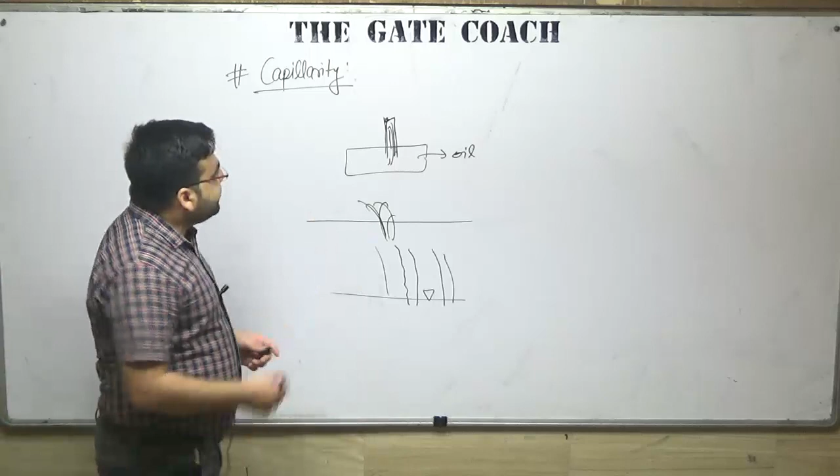Now what is actually happening is, what is the reason of capillarity? The reason of capillarity is the forces of adhesion and cohesion.

What is adhesion? What is cohesion? We already discussed this in the last class, but let me repeat it. Adhesion, 'add', means you add two different quantities, like 2 plus 2, 2 plus 3. So add means different. Similarly, adhesion means the force of attraction between two different particles, or between two different media. And cohesion, 'co' means same, so cohesion means the force of attraction between same particles.

For example, Fevicol is an adhesive. If you apply Fevicol over a surface, you can stick a paper or anything to it. So adhesion means between two different surfaces, and cohesion means between same surfaces. That is what we already discussed regarding the forces of adhesion and cohesion.

We also discussed the angle of contact in the last class. Somebody was asking for an example of a non-wetting and wetting fluid. I told them that if you have water and glass, it is generally considered a wetting fluid. If you have mercury and glass, it is generally considered a non-wetting fluid. But I cannot say water is always a wetting or non-wetting fluid, because water can behave differently in different mediums.

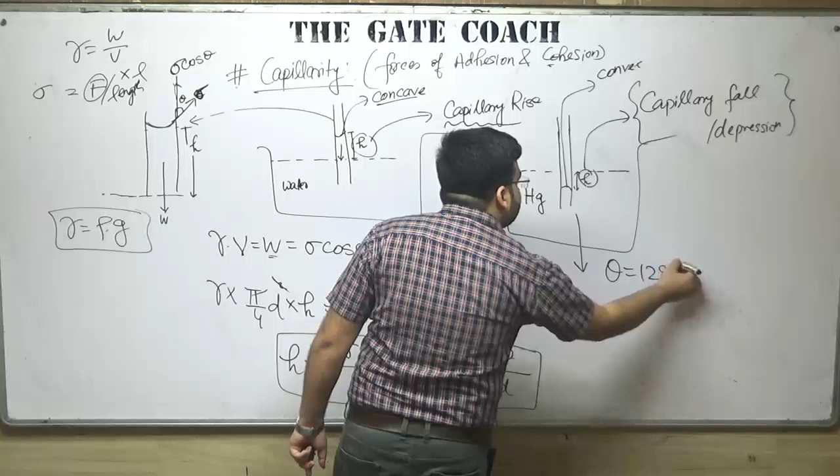The same formula is also valid for non-wetting fluids also, and for theta at this interface, you should remember two thetas. First is the theta between pure water and pure glass, that is 0, and the theta between mercury and glass is generally taken as 128 degrees. So we'll be getting some negative value.

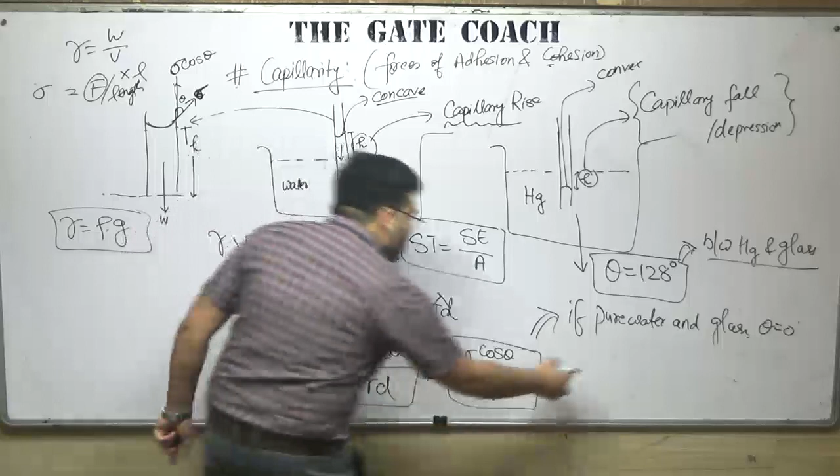Negative means it is depression or fall. Clear? And here, if pure water and glass is used, then theta is equal to 0 degree. And if theta is equal to 0 degree, cos 0 will become equal to 1. So h will become equal to 4 sigma divided by rho into g into d.

Clear? Okay, now let me see some questions.

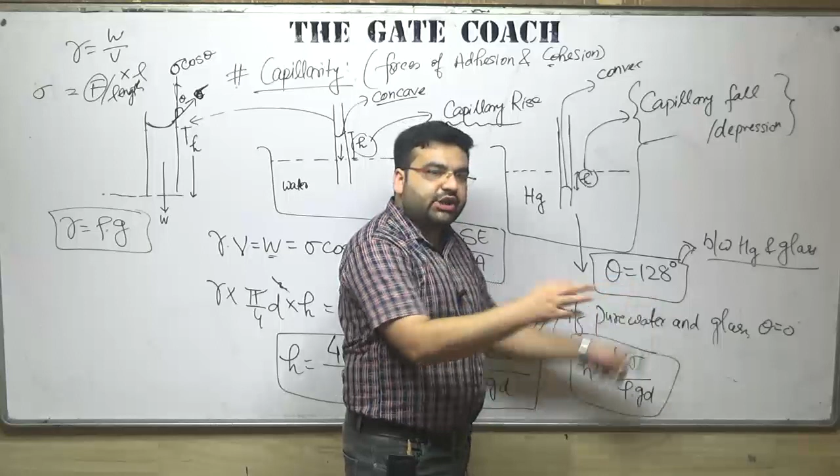Yeah, in some books it is also given as 130 degrees. Okay, but I have seen 3 or 4 books, one is DS Kumar, another one was White. So in those books it is given as 128 degrees. Generally it is mentioned here in the question, but if not mentioned, either you can take 130 or you can take 128 degrees. You will be getting a difference of hardly 0.1 or 0.2. Okay, don't worry.

Yes, the vertical component of the surface tension is acting against the weight of the fluid.

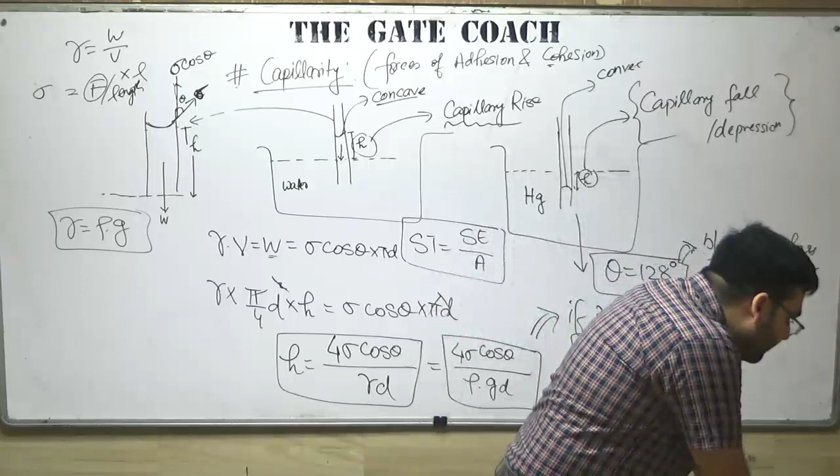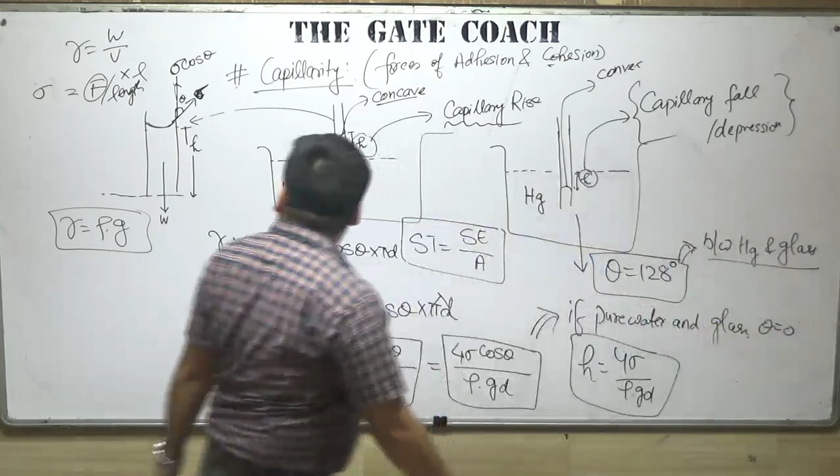Okay sir, what about sigma on the left wall of the capillary? Left wall of the capillary? This one? Here also we will have sigma, on the whole circumference.

Let me draw a top view. If I draw a top view, this is the top view of this glass. So we have sigma everywhere, here also we have sigma, sigma per unit length is everywhere. So if you want to calculate the resultant force, the resultant force will be equal to sigma into pi into d. So sigma is acting on the circumference.

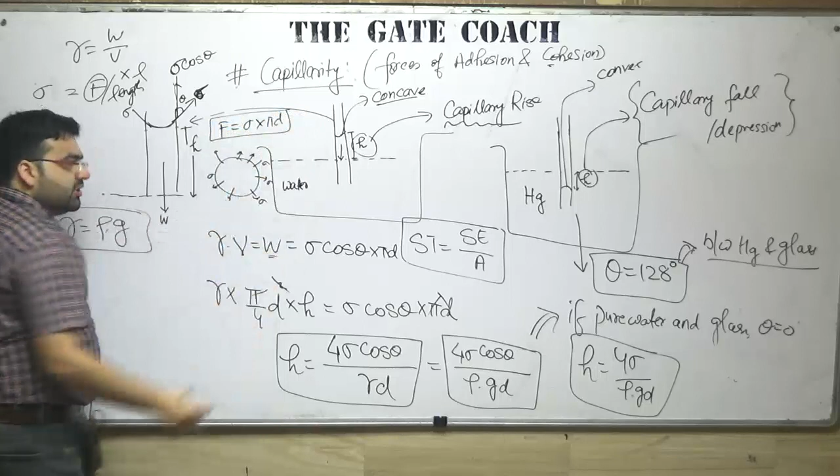Sir, if you put capillarity... Okay, please repeat, I will repeat it again, don't worry. Let me use another marker to explain it once again.

Okay sir, please repeat, please repeat. Okay sure, sure. Yeah, that is the same reason. So this is... Ranga, some name is there.

Okay sir, yesterday while explaining surface tension, you drew the resultant force acting on the particle at the surface, and net downward direction. Okay, so that is what I explained. Yesterday I explained that the resultant force is acting downwards, and today I told you that there is a tangential force.

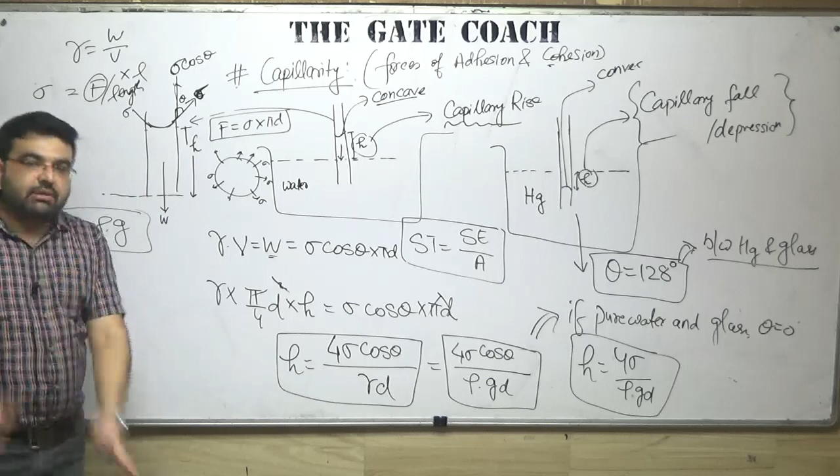So what is happening is that a particular surface, a particular liquid, due to surface tension, wants to have minimum surface area. Due to stability, it wants to have minimum surface area, because if you have the minimum surface area, you will have the minimum surface energy. Clear? So for example, this is a particle like this.

This is acting downwards, the resultant force is acting downwards, but on the surface also, yesterday I explained that these are pulling each other. Due to cohesion, these molecules are pulling each other. And at the interface, we have a resultant force. So here we have a resultant force downwards, and at the interface, we have a resultant force in this direction.

So that is surface tension per unit length. If you are calculating it with the area, it will be surface energy. If you are calculating it with the length, with the circumference, it will be surface tension.

Okay, let me again repeat it, because a lot of people are saying sir, repeat it again. Okay, so now let us repeat it with capillarity.

So what is capillarity? If somebody asks you what is capillarity, you will say that the rise or fall in a thin glass tube, due to the forces of adhesion and cohesion, is known as capillarity action or capillarity. Okay, so now what does it mean?

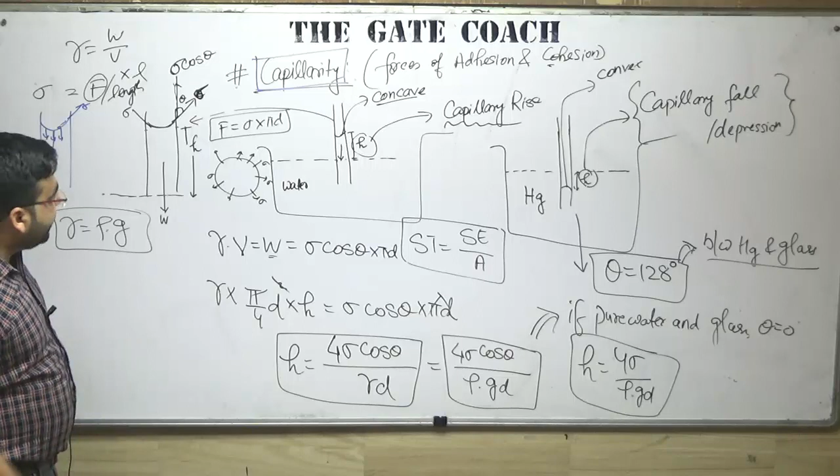So it means that, so can I rub this? First of all, note it down. Can I rub this? I will again explain. Can I rub this?

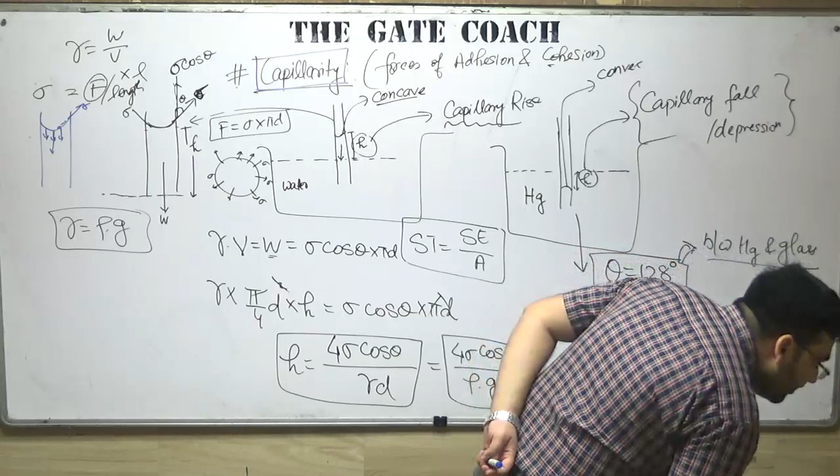Okay, कुछ समझ नहीं आ रहा. Okay, don't worry, let me again explain. Don't worry, okay, first of all note it down. Let me rub it, and let me again explain you. Don't worry, let me again explain you. Okay, now I am rubbing this, and I am again explaining you.

For example, you have a beaker. Now this is a big beaker which I have taken, and this beaker has some water up to this level. It has some water. Clear? Now what have I done?

What I have done is that I am taking a very thin glass tube, and I am putting this thin glass tube inside this beaker. Let me draw this glass tube with the help of another marker. Let us say this is a glass tube, inside this beaker.

Clear? We know that if water is present in a glass container, it will behave as a wetting fluid. Now what is wetting fluid? Wetting fluid is that fluid which tries to have the maximum area of contact with the surface, with the glass surface. It tries to have the maximum area of contact with the glass surface.

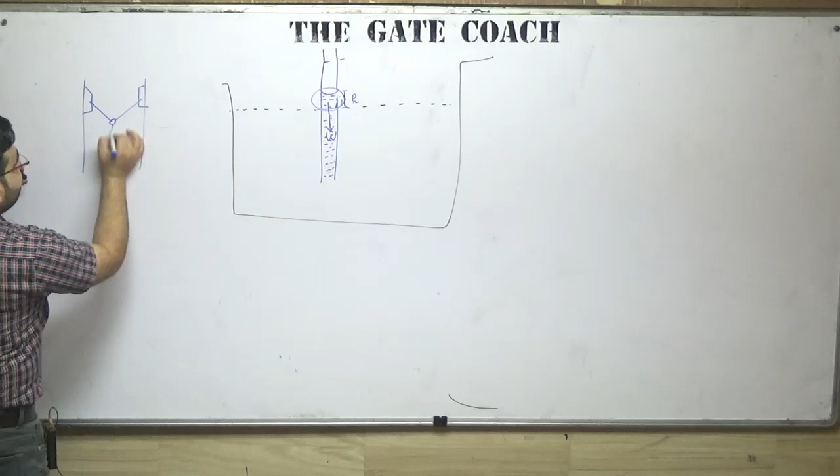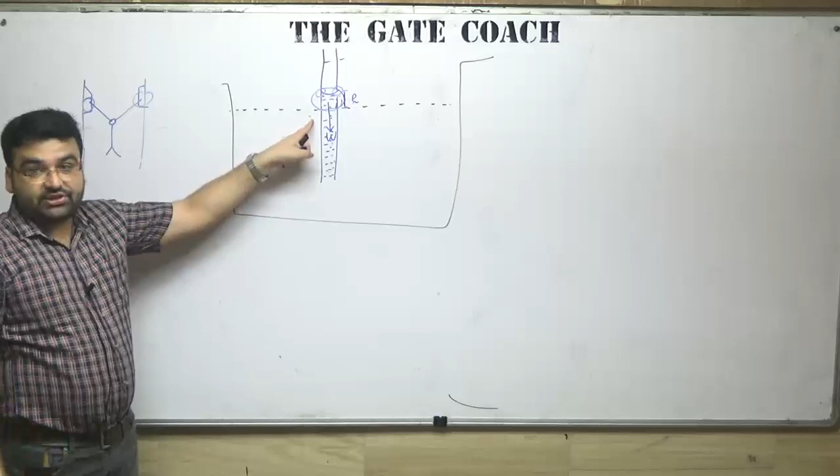So let me draw this again. These are the two walls, these are the two hooks. I hold these two hooks and am suspending downward like this. This force here is the surface tension. In case of a solid it would be a reaction force, but in case of fluid it is surface tension. My weight is also acting downwards. So here too, the weight of this fluid will be acting downwards, W. Now how much will be the weight of this fluid?

We know that weight density, gamma, is weight per unit volume. So if I multiply gamma with volume, can I get the weight? Yes, weight equals gamma into volume, the volume of this fluid.

So how much is the volume of this fluid? We can see it is a cylindrical glass tube. If it would not have been cylindrical, if it had been triangular, we would have gotten some other values. If it had been conical, we would have gotten some other values. But it is a cylindrical glass tube.

So what will we get? W is equal to gamma into the volume of a cylinder, which is pi d squared by 4, the area of the bottom, multiplied by height h. This is the weight, acting downwards.

Now we have some forces acting upward also. For example, if sigma is acting in this direction, and this angle is theta, then this component will be sigma cos theta, and this will be sigma sin theta.

So this weight is acting downwards, and sigma cos theta is acting upwards. This is the sigma cos theta force which is trying to balance this weight. So this weight should be equal to sigma cos theta multiplied by, because sigma is what?

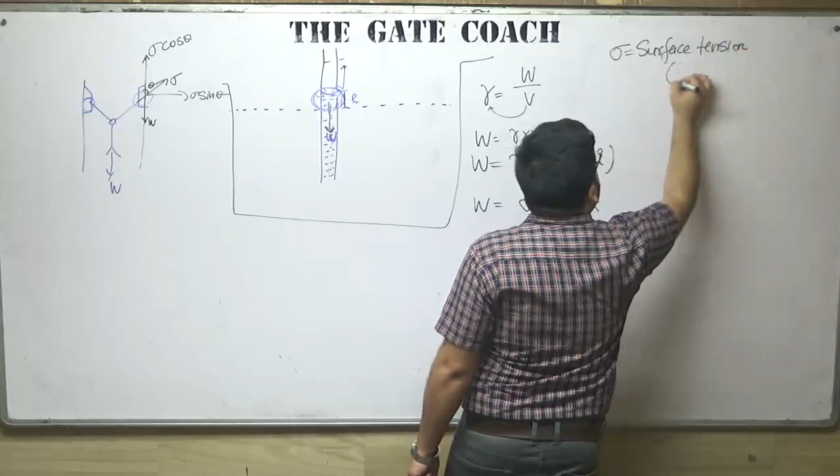Sigma is force per unit length, surface tension. Let me write it here. Sigma is surface tension whose unit is force per unit length. So, because weight is a force, I cannot equate force with a force per unit length quantity.

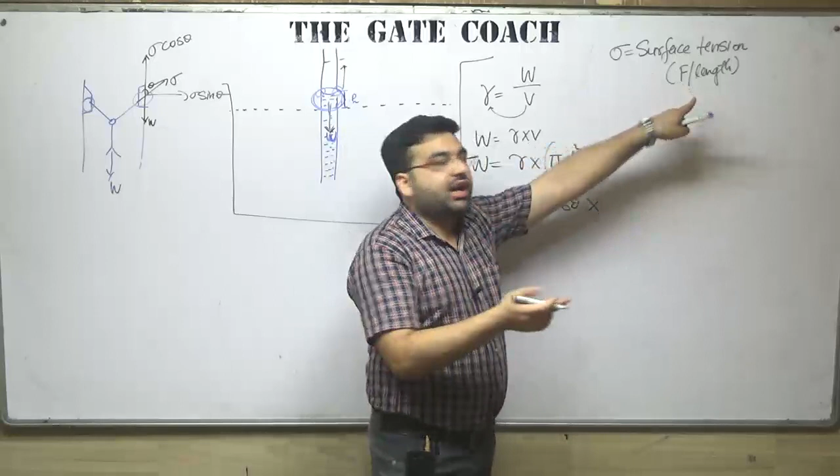I have to multiply it with length to get the force. I have to multiply sigma with some length quantity to get force. So, sigma cos theta multiplied by some length quantity. So, what is that length quantity?

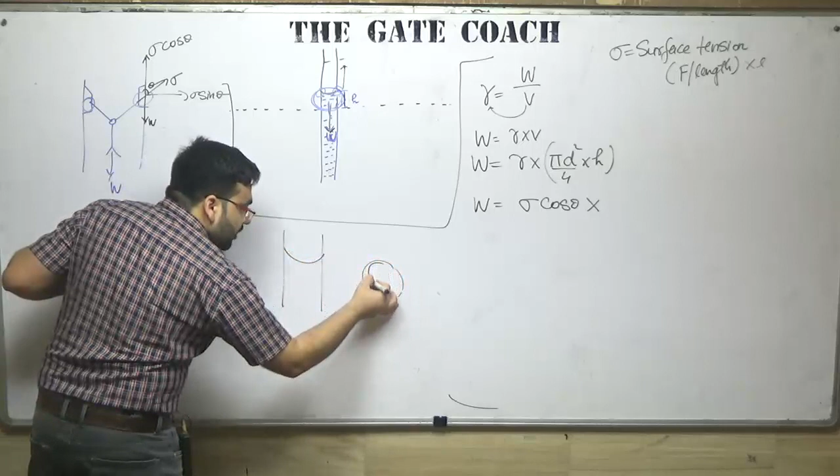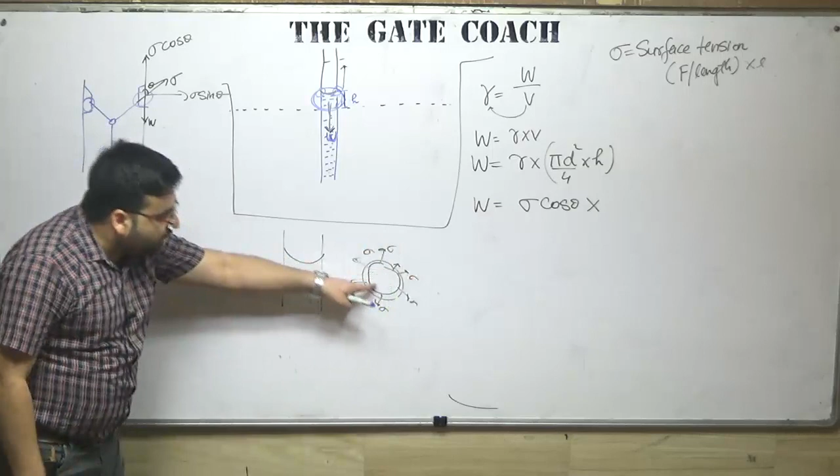So, we know that this sigma, let me again draw this. This is the front view and this is the top view. So, sigma acting per unit length, sigma. So, this sigma is acting on the circumference of this glass tube.

So, if I multiply sigma cos theta with the circumference, that is pi into d, can I get the total force? Yes, I can get the total force. So, that is the total force. And what is W? W is actually equal to gamma into pi by 4 d square into height h.

So, if you solve it, d gets cancelled out, pi gets cancelled out. So, our height will be equal to 4 sigma cos theta upon gamma into d, and gamma is equal to rho into g, that we already know. So, h will be equal to 4 sigma cos theta divided by rho into g into d.

So, that is the formula for capillary rise, and the same formula is for the capillary fall also. This is important, right? Because questions have been asked directly from this formula, and I will be solving some questions after this topic, after viscosity. So, this is a very important formula.

And theta for water, pure water and glass surface is considered to be 0 degrees. And theta for mercury and glass surface is nearly 128 degrees, and in some books 130 degrees also given. So 128, 130, whatever you want to take, but generally it will be given to you in the question.

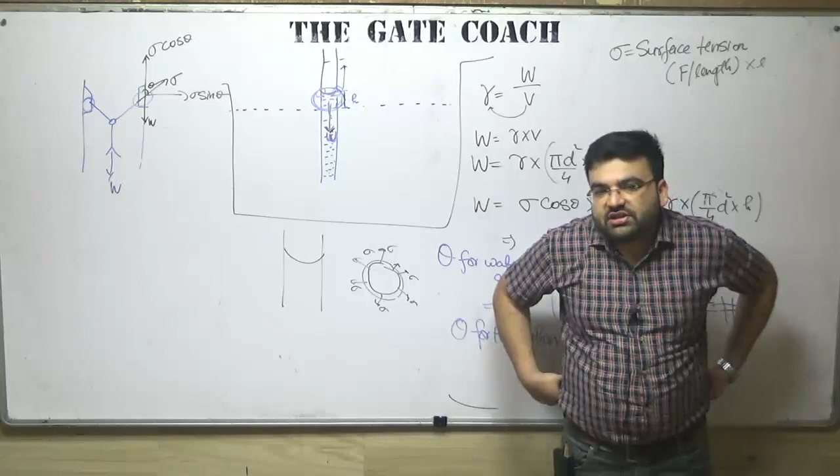Now there is one more concept which is nowadays asked generally. The other concept is annular capillarity. It is a very famous concept. Just after 2014 or 15, questions have been asked from this topic, that is the annular capillarity. So now let's go to the annular capillarity. First of all, note it down, then we'll move to the annular capillarity.

Is it clear now? Is it clear now? Is it clear now? Yes, tensile forces act on the surface of the particles. Okay, correct.

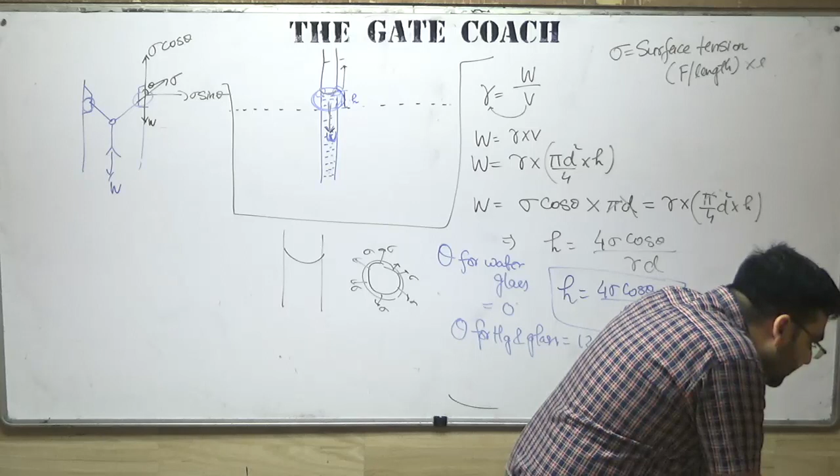Okay, so how the tensile forces are acting? Let me again explain how the tensile forces are acting. Let me change the marker. So let me draw a big tube, like this. So at the surface, let me take this water molecule, this one at the surface.

So this water molecule tries to come close with this water molecule, and this tries to come too close to this water molecule due to the force of cohesion. So here also we have water molecules, here also we have water molecules. So you can see that between two water molecules, they are getting stretched.

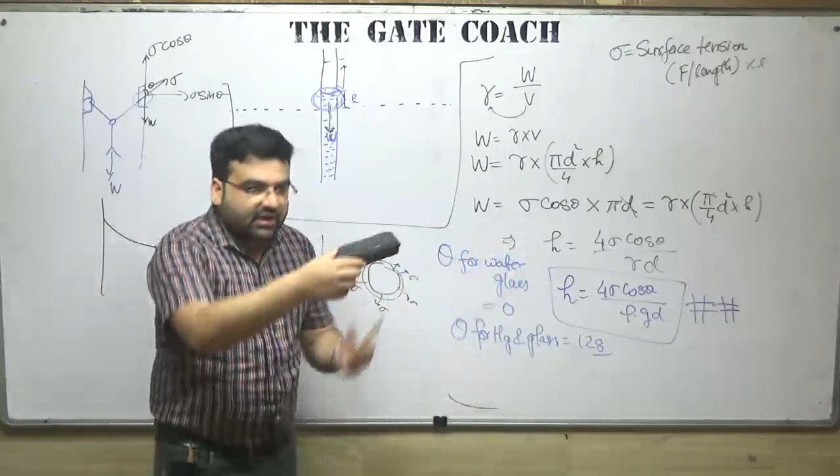So for example, if somebody is pulling you, and I am also pulling you, your hand will get stretched. And what is stretching? Stretching means tensile. For example, this is a duster. I am also trying to pull this duster, and we have some other person also trying to pull this duster. What will happen to this duster? It will be pulled. So that is tensile forces acting, and the resultant tensile force will be acting somewhere here, sigma, sigma per unit length.

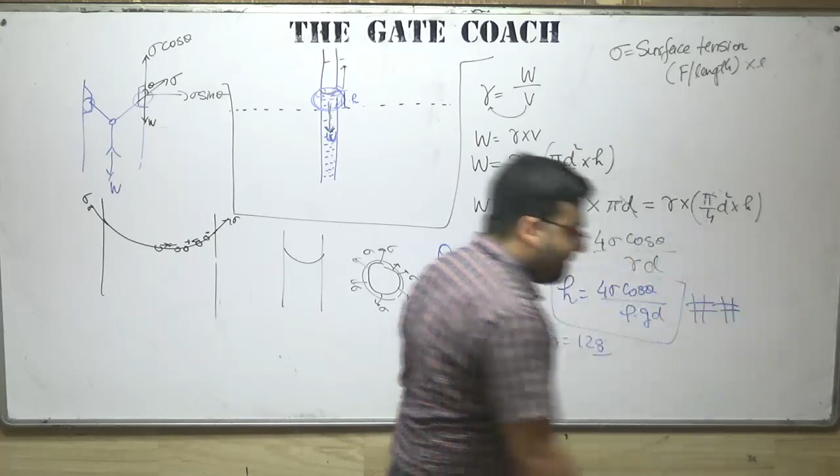Okay, shall we proceed to the annular capillarity? Okay, great. Now let's move to a new topic, that is the annular capillarity. This is a new topic, annular capillarity. Let me rub this.

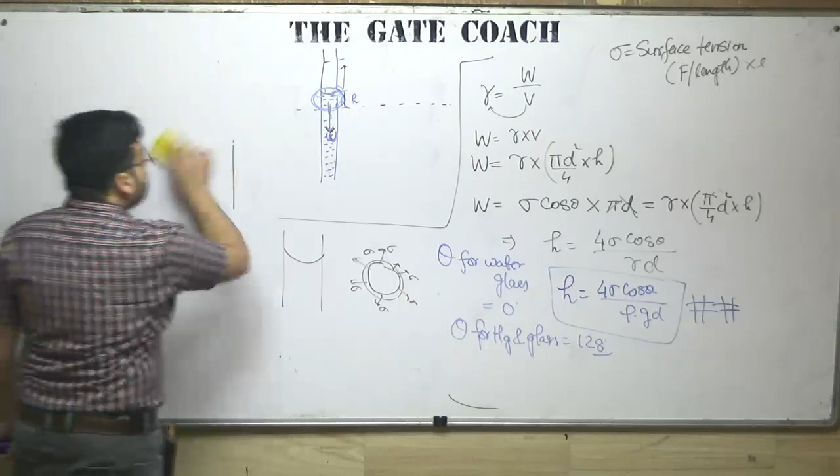Okay, now annular capillarity. Just check the spelling - A-double-N, yes, correct spelling. Annular capillarity.

Now, what is annular capillarity? Questions have been asked from this topic. The questions are like this: for example, if you have a beaker.

In this beaker, you have some water. You put some glass tube inside it, a thin glass tube. And inside this tube also, you are putting some solid tube. This is not a glass tube, not a hollow tube - it is a solid tube.

The diameter of this is, let us say, D1, and the diameter of this rigid tube is D2. So D1 is the diameter of the actual tube, and D2 is the diameter of that rigid or solid tube which you are inserting inside this tube.

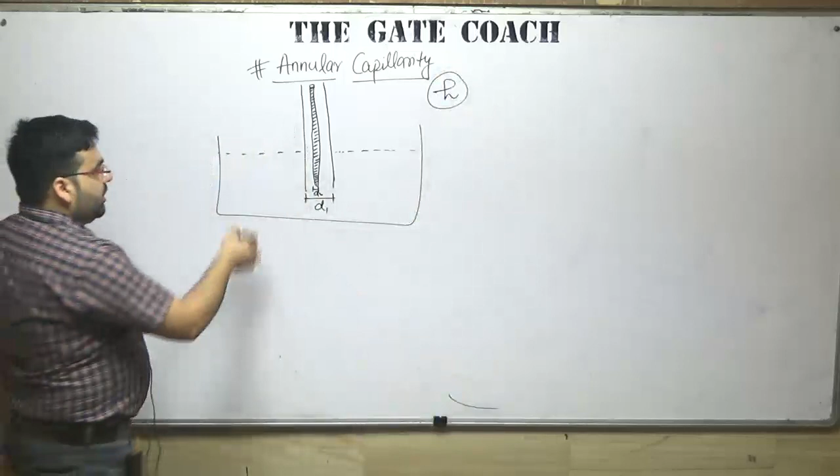Questions are being asked: what will be the capillary rise or capillary fall? For example, it is water - let us say it is water, so obviously there will be capillary rise. So capillary rise will be there like this.

This and this - let me zoom it. Here, let me zoom it. So this is the rigid tube inside it. So we have the capillary rise in this tube also and this tube also. We have the capillary rise in both the tubes.

So let us say that this is the capillary rise H up to this portion. Let us say here we have water and this is our H.

Now nowadays questions are being asked regarding the annular capillarity, and this outer has a diameter of D1, and this small one has a diameter of small D2. D1 up to this portion.

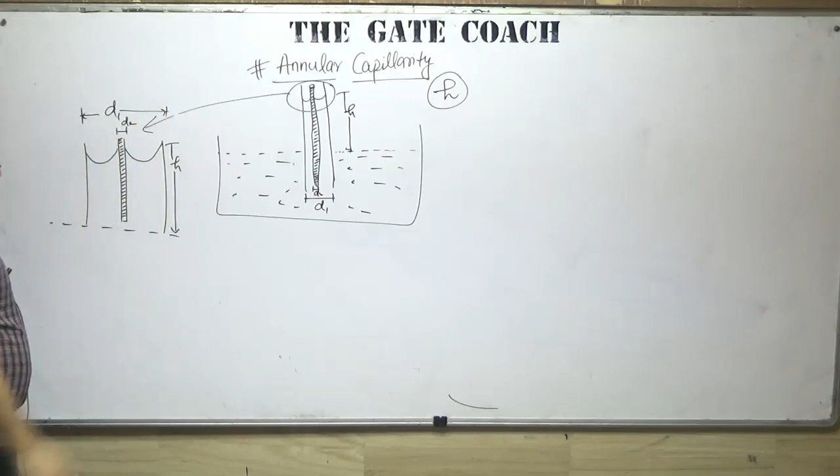Now what we can do? Do the same thing which I have just told you. What you do is that you equate the weight of the fluid with the upward tensile forces.

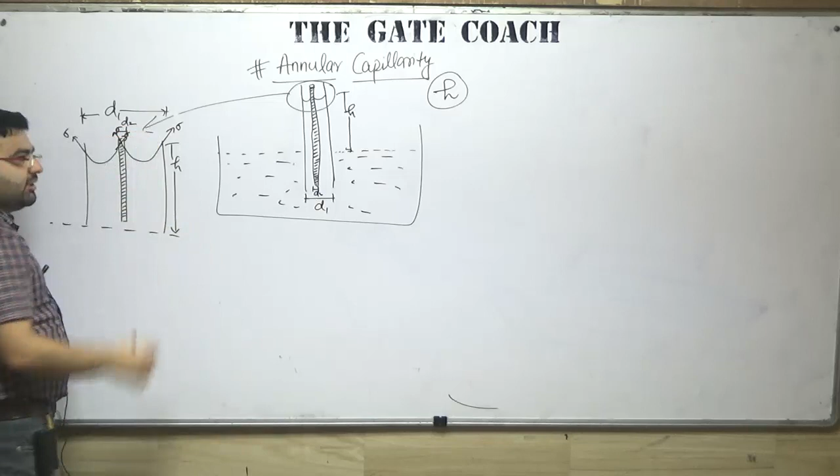Obviously here we have some sigma, here also we have the same sigma, because if it is of uniform composition throughout the periphery, we will have the same sigma everywhere. So if this is theta, this will be cos theta.

Can we do the same thing? Yes, a lot of you would have already done the same thing. Now let us compare the weight with the sigma cos theta multiplied by the length. Let us equate this - so what will be the weight of this fluid?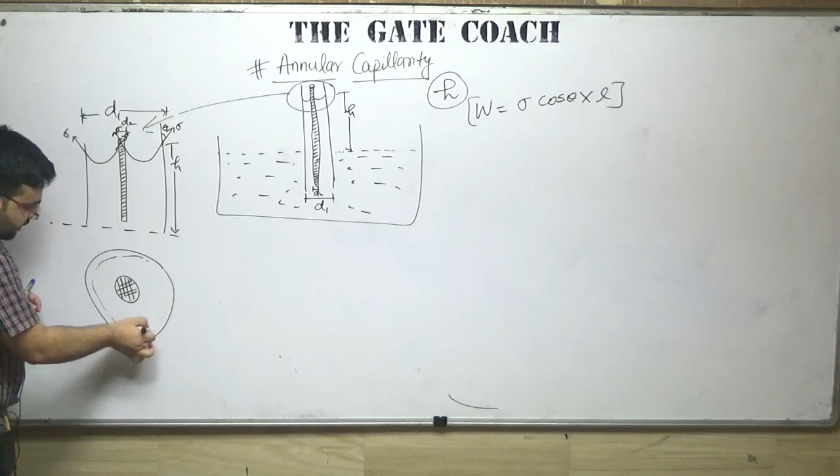So if you look at it from the top view, so this is solid, and here we have water, like this. If you look at it from the top view, you have like this. So how much will be the weight?

Weight is actually equal to gamma into volume. Now how much will be the volume of this fluid? The volume will be equal to gamma into pi by 4 into d1 square minus pi by 4 into d2 square. The outer minus inner gives the total volume, into h, the height h, because the height will be equal for both.

Can I simplify it a little bit? Yes, I can simplify. So it will be equal to gamma into pi by 4 into d1 square minus d2 square into h. This is the weight.

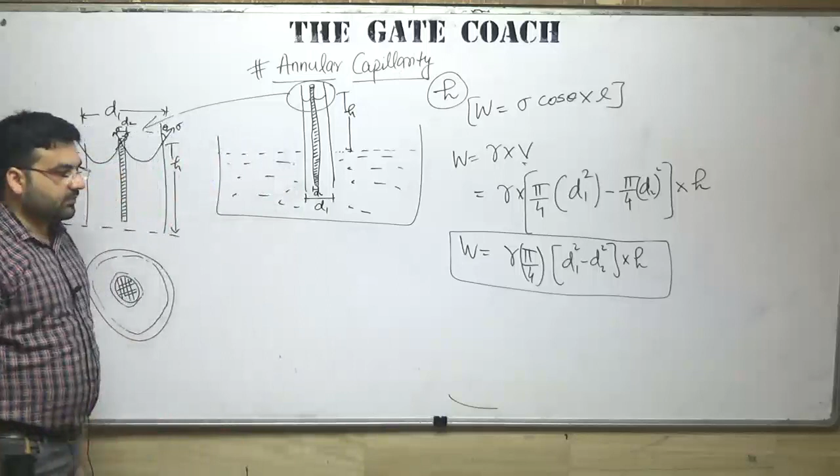Clear? Equation number 1, let us say. We have to equate this weight with the upward force. So what is the upward force? Sigma cos theta multiplied by the circumference.

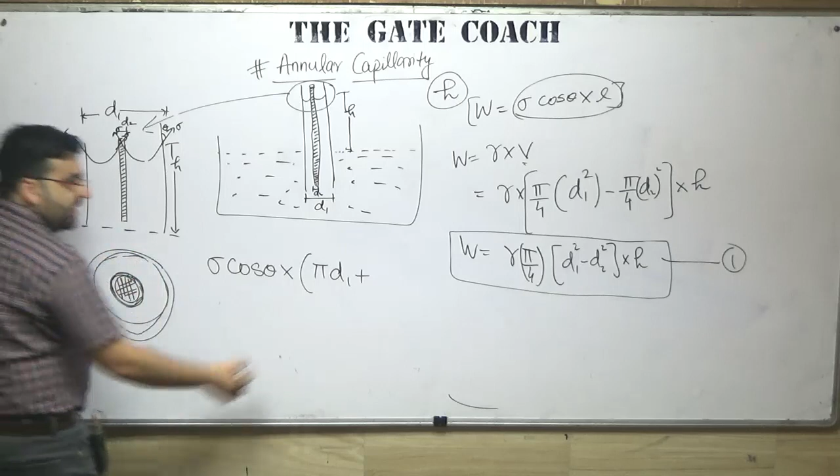For this outer tube, this is sigma cos theta into L. The outer one is pi into d1, and plus here also we have surface tension, pi into d2. So pi into d1 for this one, plus pi into d2 for this two. This is equation number 2.

Now can I equate these two equations? Yes, I can equate these two equations. Now let me equate it. So I will be getting gamma into pi by 4 into d1 square minus d2 square into h is equals to sigma cos theta into pi d1 plus pi d2.

Pi d1 plus pi d2. What do I need to get? I need to get the value of this h. Can I get the value of this h? Yes, I can. What is a square minus b square? A minus b into a plus b. Okay, so that is how we can solve it.

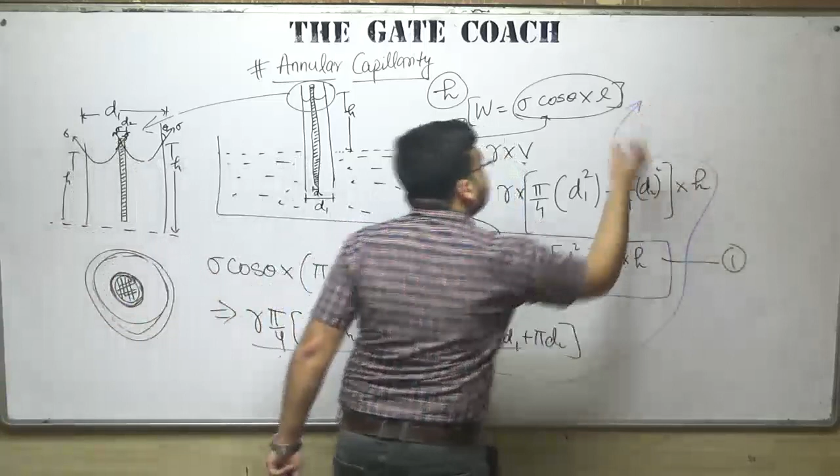Let me solve this here. Now let's see what I can get. First of all, note it down, then I will be solving it here. Okay, now...

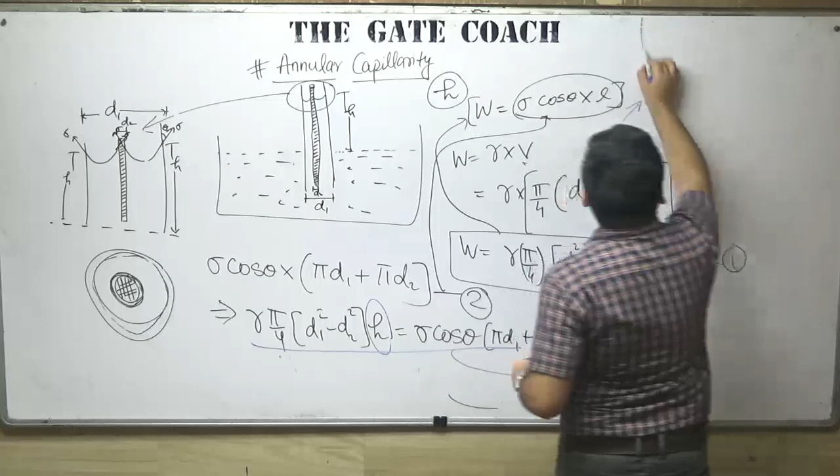So it will be equal to gamma into pi by 4 into d1 square minus d2 square. I can write it as d1 minus d2 into d1 plus d2. So d1 minus d2 into d1 plus d2 and into h is equal to this value. So sigma cos theta, can I take pi common? Yes, I can take pi. So d1 plus d2.

Clear? Can I cancel d1 plus d2? Yes, I can cancel. So d1 plus d2 and d1 plus d2 get cancelled out. So what will I be left with? So h will be equal to 4 sigma cos theta, pi will also get cancelled out. So 4 sigma cos theta divided by gamma into d1 minus d2.

That is the formula for annular capillarity. And gamma is equal to rho into g. That is the formula for annular capillarity.

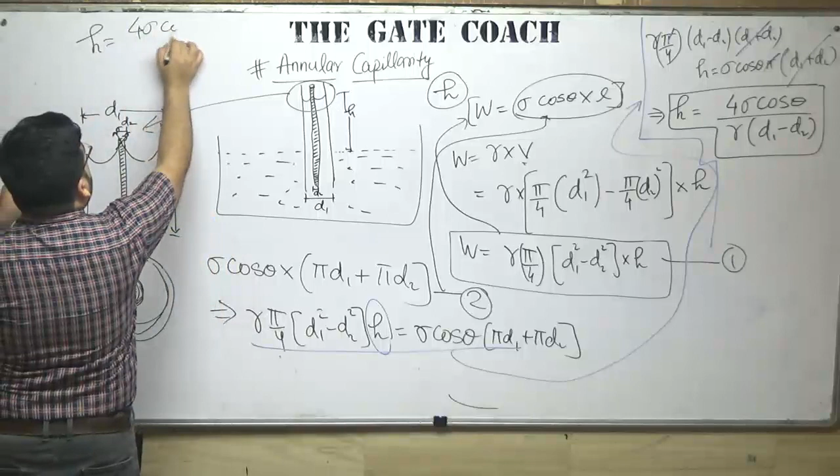So now what is happening? Is it decreasing or increasing? What do you think? Is the height decreasing compared to this value, 4 sigma cos theta? Earlier we had 4 sigma cos theta divided by rho into g into d. And now we have 4 sigma cos theta divided by gamma, which is rho g, into d1 minus d2. Is it increasing or is it decreasing?

Increasing, yes, correct. So somebody asked me a question: sir, for weight we are subtracting the diameter, while for surface tension you are adding the diameter. Why is it happening? Okay, now let me again tell you.

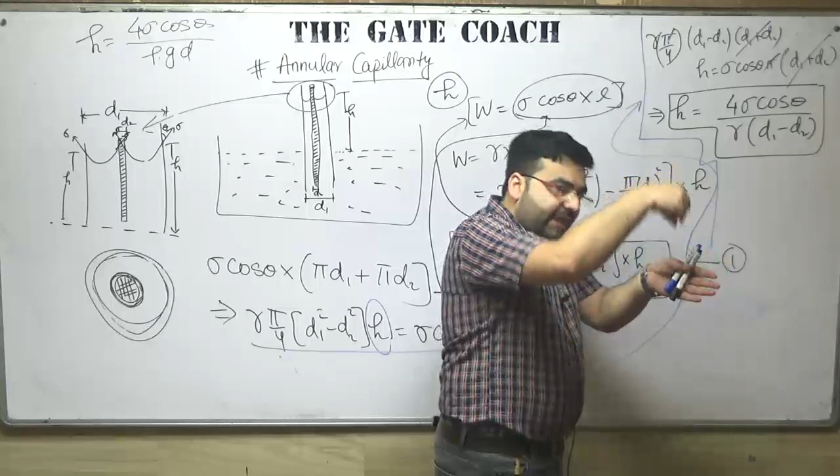Yes, increasing, correct. So we can say that as the distance is decreasing, as the tube gets thinner and thinner, there will be more capillary rise or more capillary fall. So that we can say is an interview question: as the diameter gets thinner, in annular capillarity it either decreases or increases.

Now somebody is asking me, sir, in the surface tension question you added the diameter, but in the weight you subtracted the diameter. Why? Now let me again explain it, don't worry.

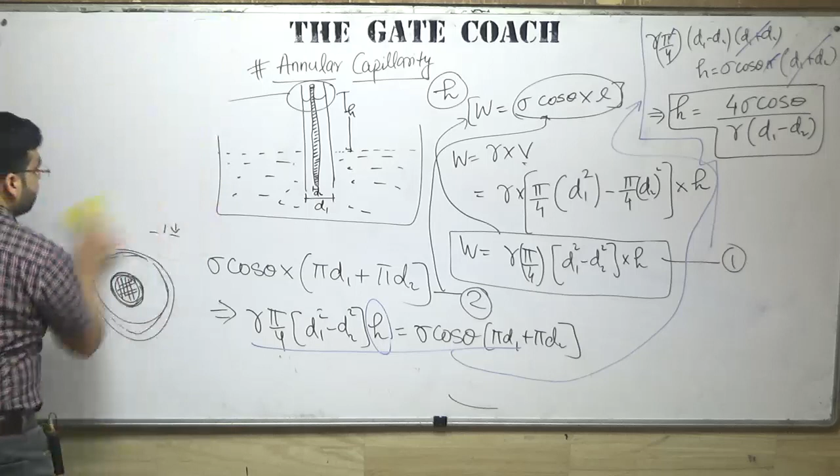Somebody is asking why in the case of weight you decrease the diameter, and in the case of surface tension you increase the diameter. Let me tell you, surface tension is directly proportional to the number of surfaces or the surface area. If the surface area or number of surfaces increases, the surface tension will increase.

But if you are decreasing the quantity of matter, the weight will decrease. Simple. For example, this was a glass tube, this is a tumbler, a container, and this is a glass tube.

Let me draw this glass tube with a big diameter, like this. And inside it we have a rigid, solid tube. If I look at it from the top view, it will look like this - this is the outer one, let us say D1, and inside we have this rigid D2 tube.

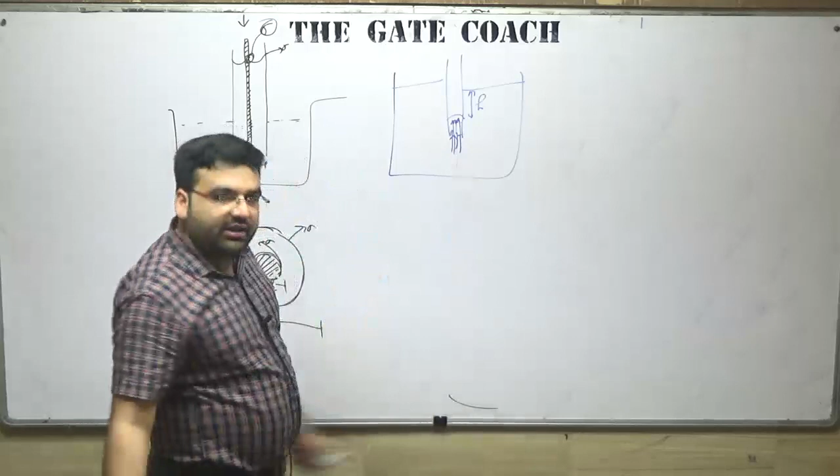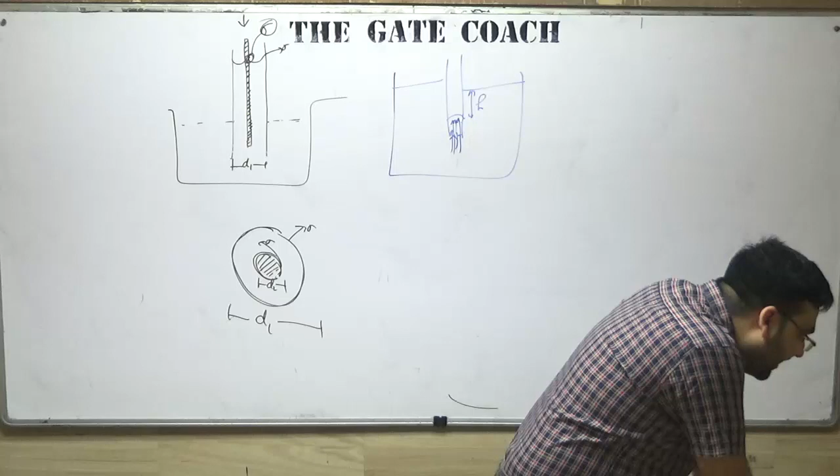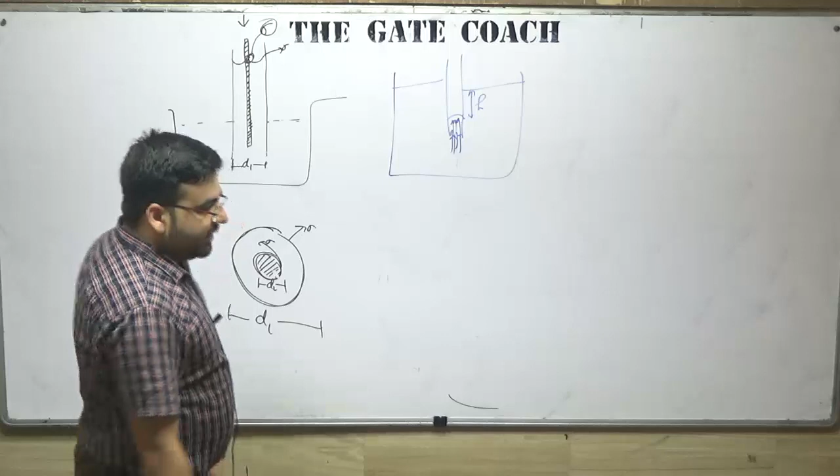Bahubali of fluid mechanics? No, I am not the Bahubali of fluid mechanics. They are very senior professors than me, teaching for 20 to 25 years. So obviously I am not the Bahubali - I am a student of those Bahubali people, okay.

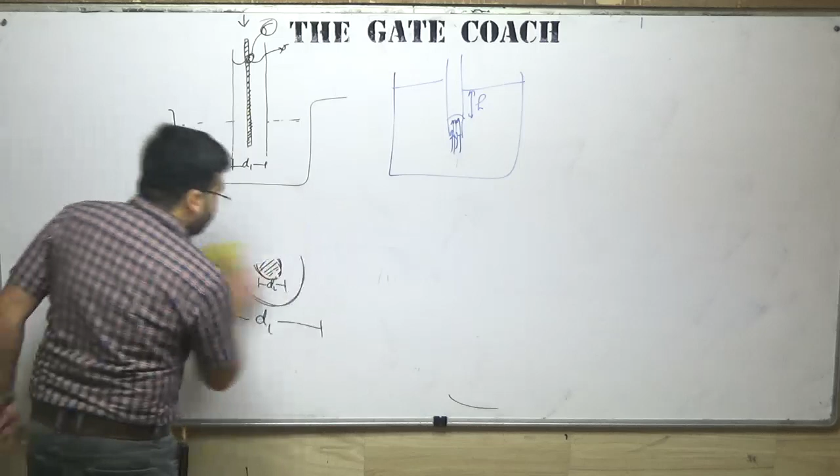Okay, now let us move to the next property of fluids, and that is known as viscosity.

Viscosity. Check the spelling. Yeah, viscosity. Okay, viscosity, next property, that is the viscosity.

One more thing, this is also an interview question. The question was like this: the capillary rise or capillary fall, on which factors does it depend? So now let us discuss that, then we will come to viscosity also.

So now, factors affecting capillary rise and fall. Whenever somebody asks you what are the factors influencing that particular property, just write down the formula and you will see what are the factors affecting it. So we know that H is equals to 4 sigma cos theta divided by rho into G into D.

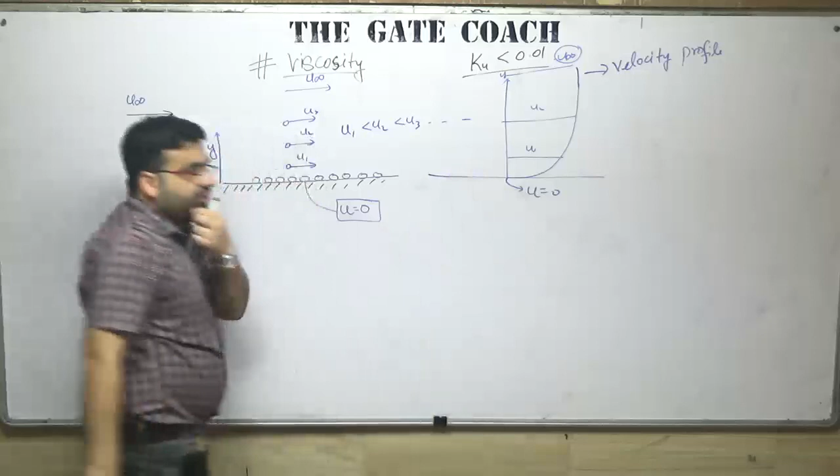Now the question is, sir, why are you telling us this? Why not viscosity directly? Because viscosity is directly related to this velocity profile distribution. Clear? Now how is it related?

Now let me take two sections - this section and this section. Let me take this section and analyze it here.

So let us say this is A, B, C and D. I have taken this section. This is A, B, here we have C and D, like this. So this AB has velocity u2, and this CD has velocity u1. This AB has velocity u2, this DC has velocity u1.

Now we know that u1 is less than u2. It means this velocity is smaller than this velocity. Or I can also write u2 as u1 plus some change in velocity, du. I can write it like this.

For example, it was 2 meter per second, and it is, let us say, 2.5 meter per second. So can I write it as 2 plus du is 0.5? Can I write it like this? Yes, I can write it. So it is u1 plus du.

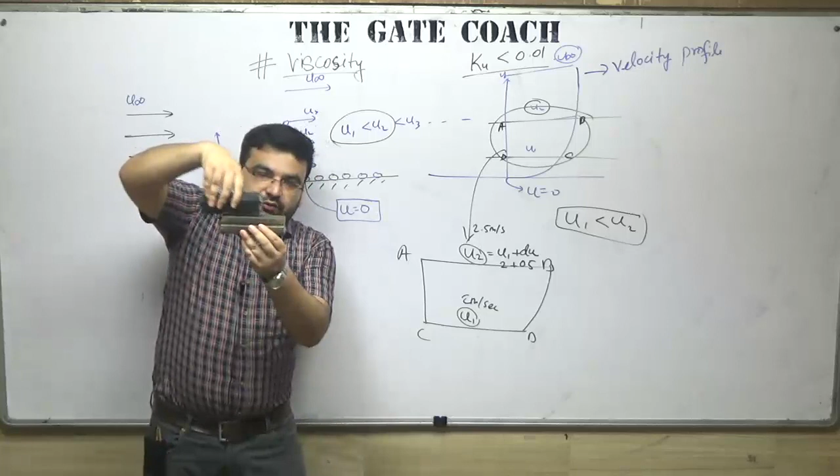So you can see that the upper layer is moving with a higher velocity as compared to the lower layer. Both are moving, but the upper layer is moving with a higher velocity.

So you can see that in between these two surfaces, or in between these two layers, we have a shear resistance. Again, let me explain you.

For example, you have a friend of yours who runs very fast, and if he runs 100 meter dash, he comes first. And when you run 100 meter dash, let us say you come at 6th or 7th position. Now I have tied you two people, the fastest runner and you, a slow runner, with a rope. And I will say both of you just finish the 100 meter dash. So obviously your friend will be running faster and you will be running slower.

But what will happen is that due to your slow running, your friend will also become slow after some time. He will feel some resistance. That property is known as viscosity, resistance to flow. Why is it happening? It is because of the shear stresses between the layers? This layer is trying to pull this layer, but this layer is trying to restrict this layer. So if there is difference between the velocity, there are some shear stresses developed between two surfaces or two layers. That is the reason viscosity is being generated. That is the reason of viscosity.

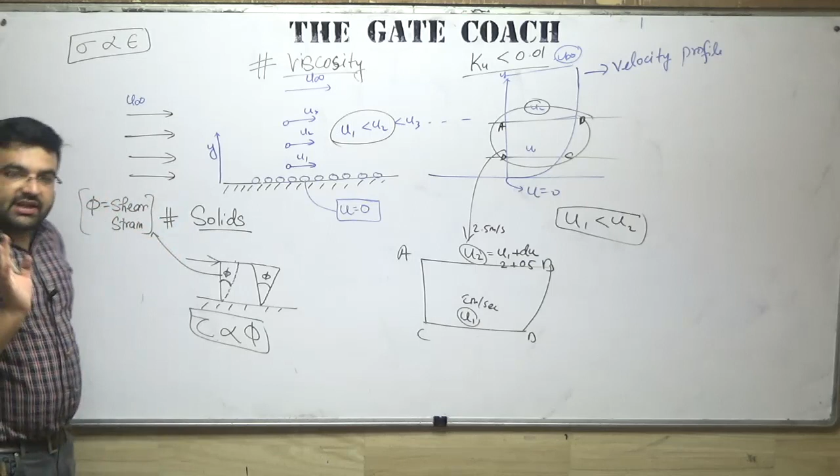But when it comes to fluid, if you apply some force on the fluid and then remove that force, the fluid will never come back to its original position. But in case of solids, if you remove the force, the solid will again come back to its original position. For example, if you have rubber and you stretch it with some force, it gets stretched, but when you remove the force, the rubber comes back to its original position because it is a solid. It has some elasticity.

But when you have a glass of water and you tilt it, what is happening? The normal force is getting converted into shear force. If you tilt a glass of water, after some time the liquid will start coming out. So we can say that Hooke's law, which is valid in solids, is not valid in liquids.

The Hooke's law which is valid in solids is not valid in liquids. So on the walls, which kind of condition do we have, no slip condition? Yeah, on the walls there is a no slip condition.

Can we compare viscosity of a fluid with adhesion or cohesion? The viscosity of a fluid, you can compare it with cohesion, not adhesion. You can compare it with cohesion.

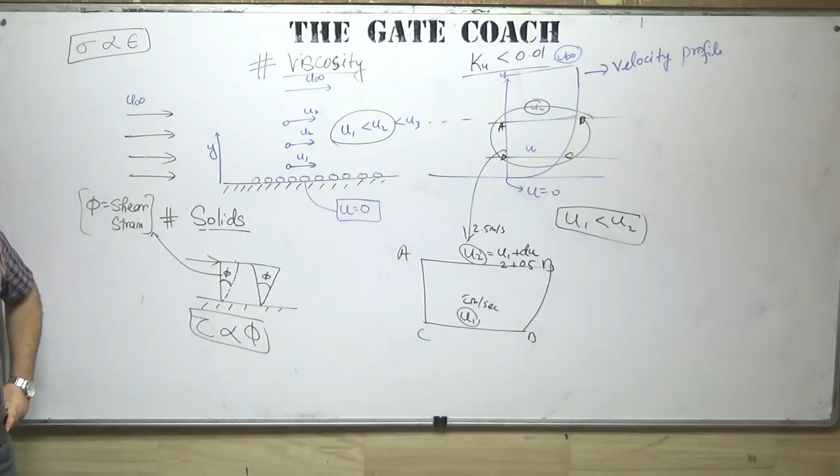Okay, now let's repeat it. Can I have some water? Okay, let me have some water, then we will continue. Don't worry. Okay, let me rub this. I guess that you have noted this. Let me rub this and again explain this to you. Okay, can I rub this? Shall I rub this? Yes, okay, I am rubbing this and I am again explaining to you. Don't worry, okay, I am again explaining.

Okay, now let me explain again. For example, let me take a solid surface. Everything we will be discussing in fluid mechanics, we will be considering that the Knudsen number is less than 0.01, which means it is a no slip condition. No slip condition means that the particles which are in contact with this surface, due to the force of adhesion and van der Waals forces, get stuck to the surface.

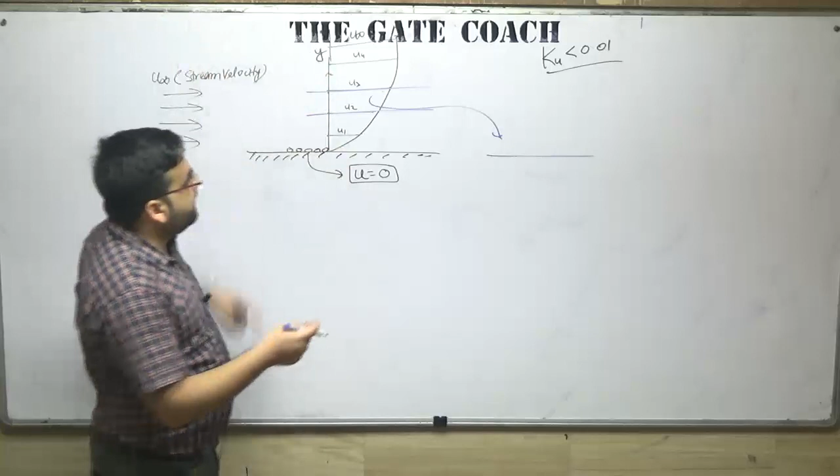Okay, this is A, B, C, D, A, B, C and D. So you can see that this AB layer has velocity u2, this DC layer has velocity u3, and we know that u2 is less than u3. If this is 1 meter per second, this can be 1.5 to whatever, but it will be greater than that. So u3 is greater than u2.

Clear? So now, if u3 is greater than u2, this u2 is offering some resistance on the layer DC. This layer AB, which has a velocity of u2, is offering some resistance on the layer DC. To make you understand how it is offering the resistance, I give you an example.

Let us say you are 2 friends, one runs very fast and one runs slow, but if I tie those 2 friends with a rope and tell them to run, one friend will be running fast but one will be running slow, but due to this slow friend, your fast friend will also become slow after some time. It means this slow friend is resisting, making some resistance to the fast friend. It is trying to make the velocity of this friend also slow. It also wants that you also run with my speed. So it is offering some resistance to this velocity.

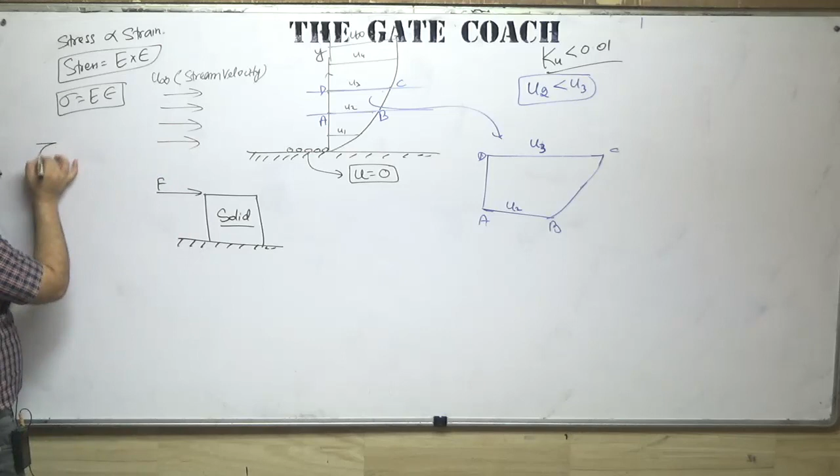If you have shear stresses, they are denoted by tau, T-A-U. Shear stress is directly proportional to shear strain. This angle, phi, is known as the shear strain. So tau is directly proportional to shear strain.

The question was: why is Hooke's law not valid for fluids? Why do we have a different law known as Newton's law of viscosity? Why is Hooke's law not valid? So that is what I was trying to explain to you.

Because, for example, if you have a solid body, if you apply some force and you remove that force, after some time the body will return back to its original position. To make you understand, I gave you the example of rubber. If you stretch rubber and remove the force, it will again come back to its original position. That is known as the property of elasticity.

But as far as fluids are concerned, if you have fluid inside walls, now you apply some force on these walls and then remove it. What will happen? The fluid will keep on flowing like this, even if you have removed this force, because the force of attraction between particles in a fluid is very less as compared to that of a solid. That is why even if you apply a small force, it will keep on flowing.

It will keep on flowing means that this phi, the shear strain, will keep on changing with time. After 1 second, it is this. After 2 seconds, it will be like this. After 3 seconds, it will be like this. So this phi will keep on changing with respect to time. So that is why Hooke's law is not valid.

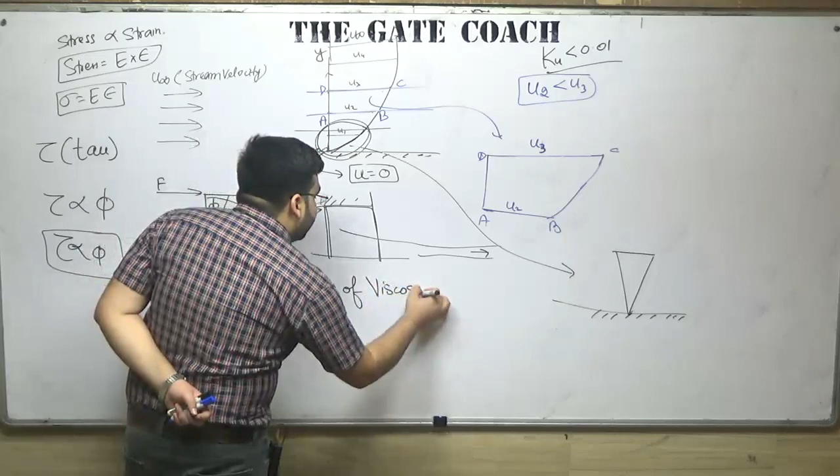Now let us understand what is Newton's law of viscosity. Somebody was asking me, sir, what is the difference between shear stress and force? If you multiply the shear stress with the area, you get the force. Newton's law of viscosity says that shear stress, whose unit is Newton per meter square, same as pressure, Pascal, is directly proportional...

...to the rate of change of the shear strain, d theta divided by dt. Never ever tell anyone that tau is directly proportional to du by dy - this is a very common mistake. I will explain how this has actually come, but whenever somebody asks what is Newton's law of viscosity, always tell them that shear stress is directly proportional to the rate of change of shear strain. It can be theta or phi. For Hooke's law I considered it phi; for fluid, let us say it is theta.

So what is Newton's law of viscosity? The shear stresses in a fluid are directly proportional to the rate of change of the shear strain. Now the question is, we know that tau equals mu into du upon dy, but how has it been derived? If tau is directly proportional to d theta by dt, it should be mu into d theta by dt - yes, that is correct, but if we derive something, we will see that d theta by dt is equal to du by dy.

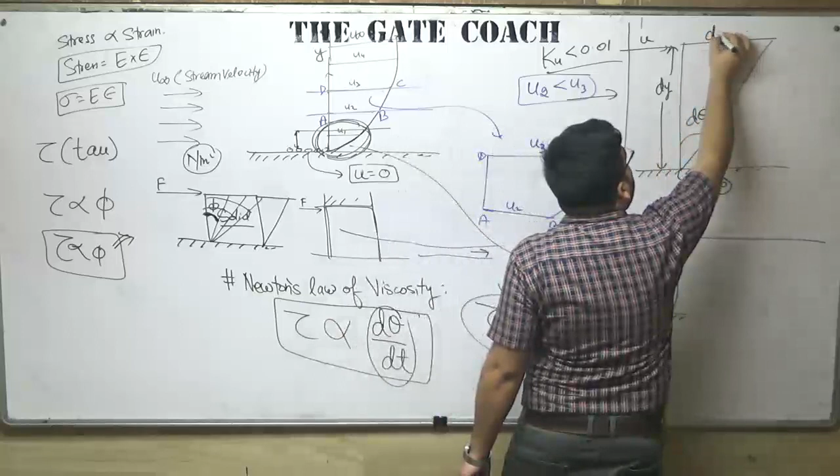So how much distance would it have traveled in that time? We know distance equals speed into time, so u into dt. Can I say du into dt, because du is also a very small change? Yes, I can say that. Now from this triangle, let me rub this.

Now from that triangle, how much will be tan d theta? Tan theta is equals to perpendicular upon base. So what is the perpendicular? Perpendicular is this, so this is du into dt, divided by base. Base is dy. Divided by dy. And we know that if this d theta is very small, then tan d theta is almost...

equal to d theta. Because tan 0 is 0, tan 0.0015 is almost equal to 0.0015, if it is very small. So tan d theta is almost equal to d theta.

So can I write it like this, that du into dt upon dy is equals to d theta? Yes, I can write this. Can I write that du upon dy is equals to d theta upon dt? Can I write like this? Yes, I can write. Clear?

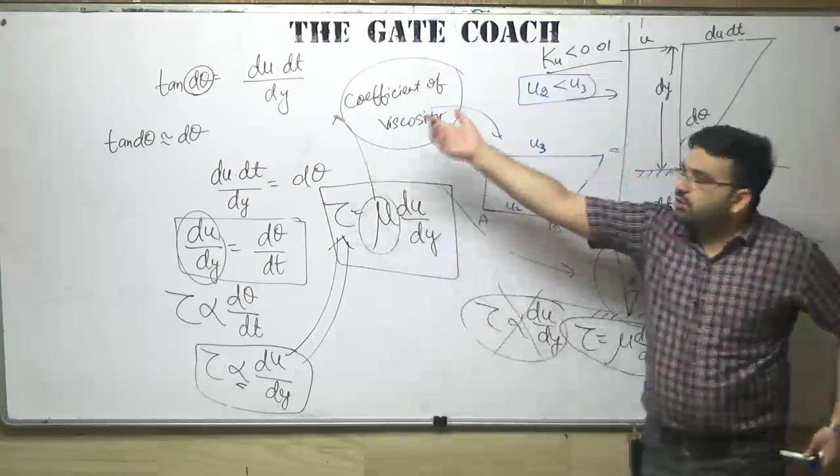Coefficient of viscosity. Somebody also gets confused with the coefficient of viscosity. If I ask them what is viscosity, they say mu. Mu is viscosity - mu is not viscosity. Viscosity is the resistance to flow, that is a property. Mu is not a property, mu is a constant.

Clear? So tau is equals to mu into du by dy. And du by dy is also known as the velocity gradient. Remember one thing, from now on, if somebody is saying gradient, it will always be with respect to, generally it is with respect to distance. Pressure gradient, what is pressure gradient? dP by dy. What is shear gradient or the velocity gradient? It is du by dy. So it is generally with respect to distance, gradient.

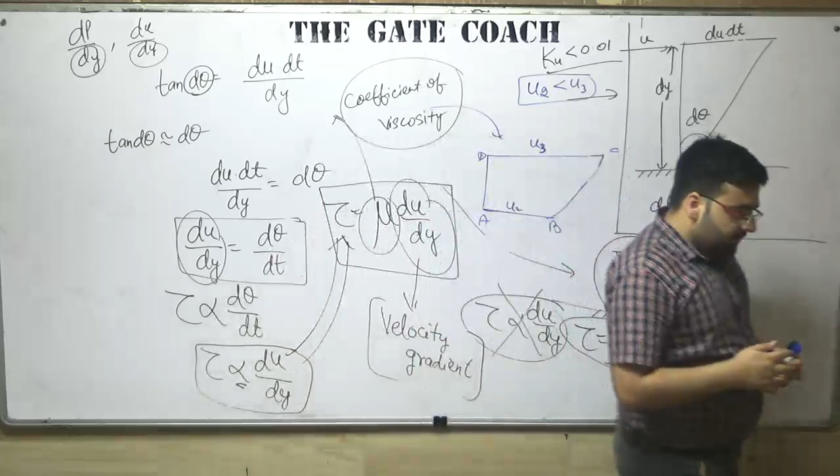Sir, please explain once again. Don't worry, I will again explain you. Clear? So tau is equals to mu into du upon dy. Don't worry, I will explain you, but let me first of all finish this regarding this mu. Clear? Mu is known as the coefficient of viscosity.

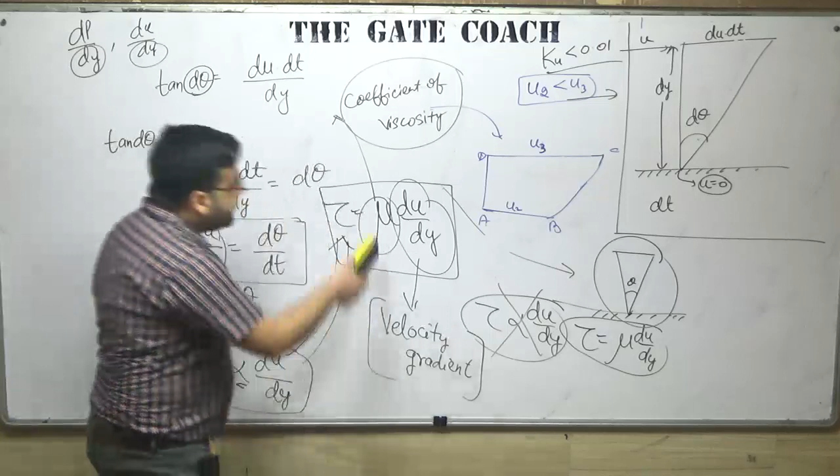Now let us understand about this coefficient of viscosity, mu. Now what does this coefficient of viscosity tell us? If the coefficient of viscosity is high, it means that particular fluid will have higher resistance to flow. If the coefficient of viscosity is small, that particular fluid will have lower resistance to flow. That is what it is actually telling us about. Because if the coefficient of viscosity is high, the shear stresses will be high. If the shear stresses are high, it means one layer is going with a very high velocity and another is going with a very low velocity.

Clear? Now let us understand about this mu, that is the coefficient of viscosity. Oh sorry, I rubbed it. Shall I rub it? Okay, shall I rub this?

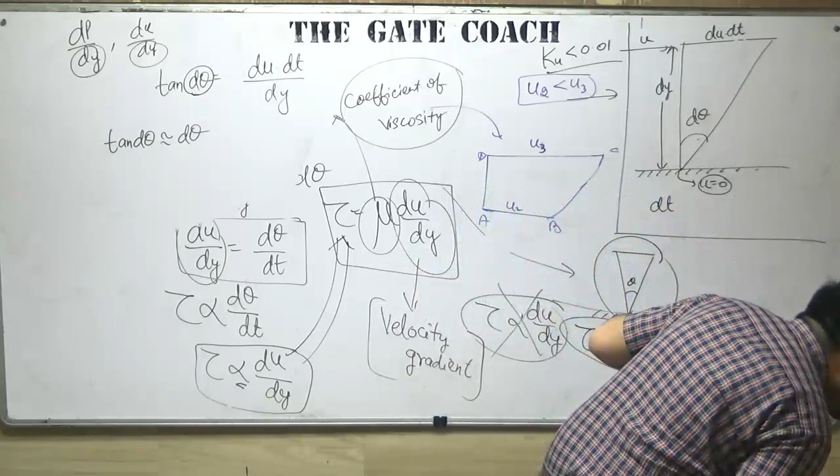Okay sir, is there a u1 minus u2 which is du? Yes, u1 minus u, don't worry, I will be telling you that also. Du is a very small change. For example, I told you that this is u1, this is u2 and u3, and I told you that u3 is equals to u2 plus du. So this du is very small change, this is du, small change.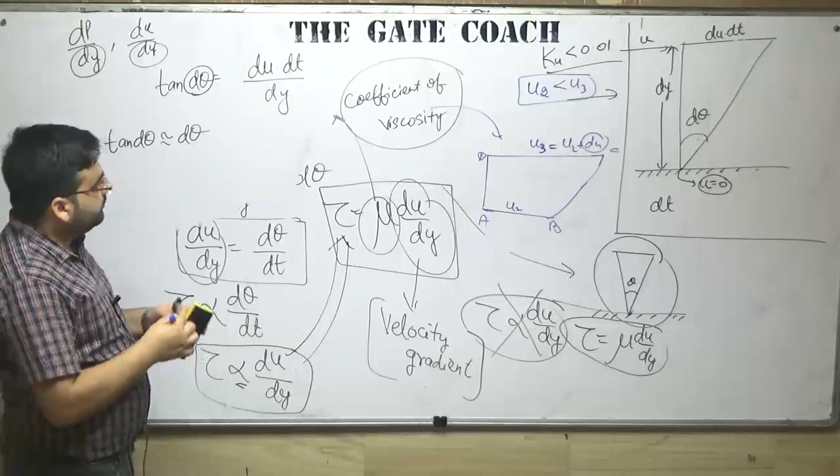Now let us understand about this term, that is the coefficient of viscosity mu.

Mu, that is the coefficient of viscosity. Clear? First of all, what should be learned from this coefficient of viscosity? First is the dimensional formula of coefficient of viscosity. We know that tau is equals to mu into du upon dy.

Now what is tau? Tau is the shear force per unit area. What is the unit of force? Newton. So it is Newton. What is the unit of area? Meter square, SI unit. I am talking about SI unit.

It will be equal to mu. What is this? U is meters per second, divided by dy which is meters. So meter gets cancelled out. So mu will be equal to Newton second per meter square.

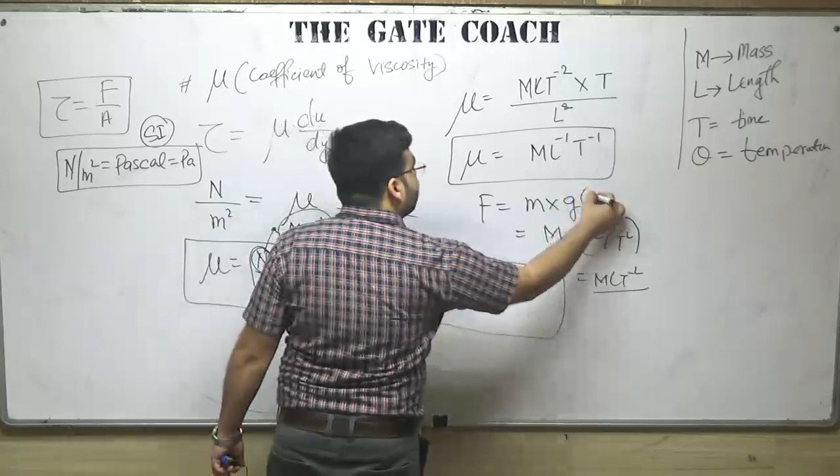And how this MLT minus 2? We know that force is equals to mass into acceleration due to gravity. Mass has M, acceleration has meter per second square, so length per second square. So it is MLT minus 2. Mass has kg, that is M, mass.

So ML minus 1 T minus 1, or Pascal second, that is the SI unit. Clear? Now let's go to the CGS unit. What is CGS? So we have done about the SI units. Now let's go to the CGS unit.

CGS is centimeter, gram and second. Now if we go to the CGS units, instead of Newton, we know that the Newton in CGS is termed as dyne, D-Y-N-E. So mu will be equal to dyne multiplied by second, and length will be equal to centimeter divided by centimeter square. So this is the CGS unit of mu.

And this unit in CGS is termed as poise, P-O-I-S-E. The CGS unit is also known as poise.

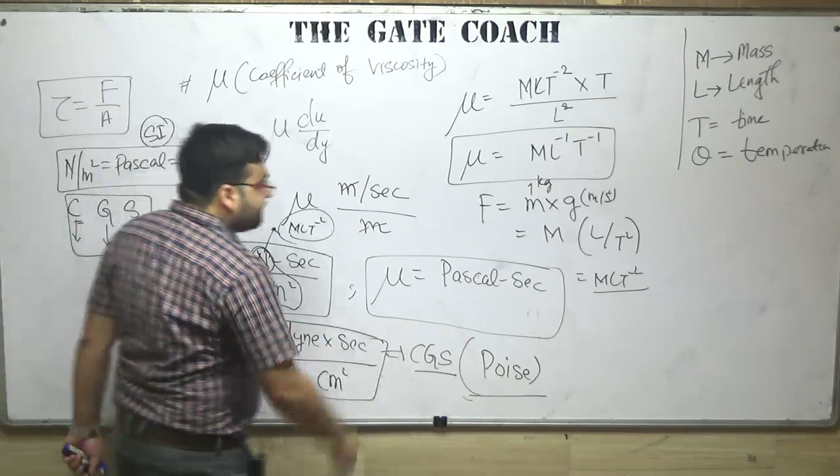So this CGS unit is known as poise. Now the question is, which value of mu has to be remembered? So the coefficient of viscosity of water is important.

The coefficient of viscosity for water is 1 centipoise. Cp means centipoise. What is centi? Centi is 10 raised to the power minus 2 poise, at 20 degrees Celsius. That has to be remembered.

That has to be remembered, because I have seen that in GATE examinations, questions are coming that a fluid has viscosity 100 times or 200 times that of water. So what is the viscosity of that fluid? If you don't know the viscosity of water, you will not be able to get the answer.

Clear? So this was all about viscosity. Now let me again repeat it, because somebody was asking, sir, what is this du? Somebody is saying that if there is no contact, then will the velocity come into picture, will viscosity come into picture? So now let me come to this topic again. Shall I rub this and repeat it again?

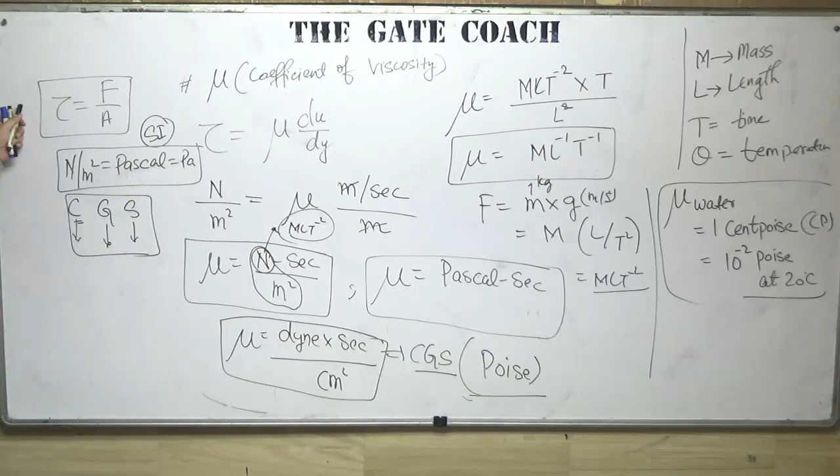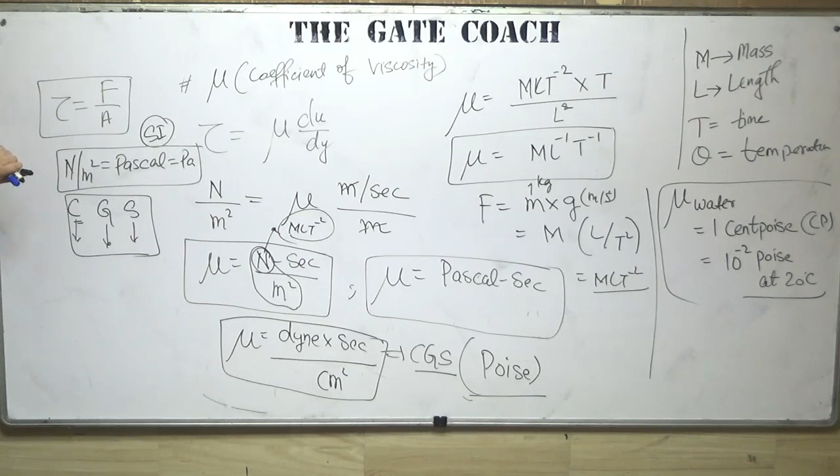Okay, now let me rub this and repeat it again regarding viscosity, how we have derived the formula.

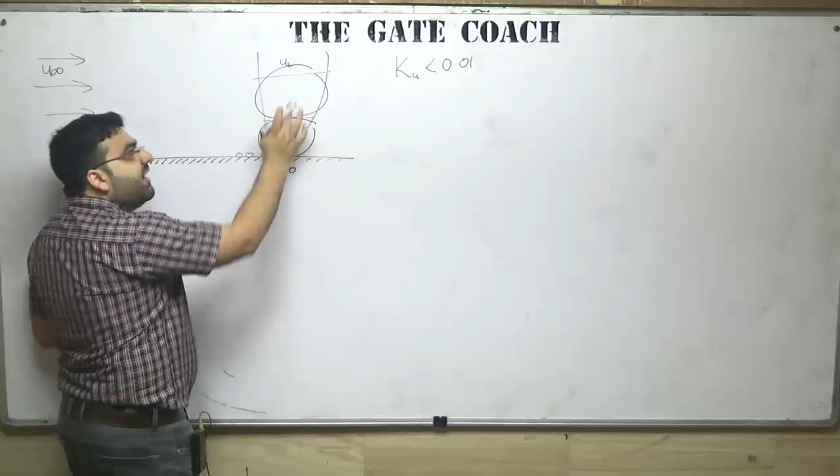So what I am doing is taking any section. I can either take this section or that section, any small section. So let me take this one. If you are confused why I have taken this and not that, let me take that also, I can take this section also.

If I am taking this section, then the upper one has a velocity of u1 plus du, and the lower one has a velocity of u1. If I multiply it with the time dt, this particle would have traveled only this much distance, and this particle would have traveled this much distance. If I draw a perpendicular, again I will be getting the same diagram.

Okay, and this distance will be equal to du into dt. This distance will be equal to, this is d theta, for a very small section, that is dy. Now don't get confused, because in the earlier derivation I took this section. I can take any section, because somebody was asking me, sir, why this, from where this du has come. So to make you understand, I have taken this section, but I can take this section also. So tan d theta equals d theta equals du into dt divided by dy, and d theta divided by dt will be equal to du by dy, same thing which we have got.

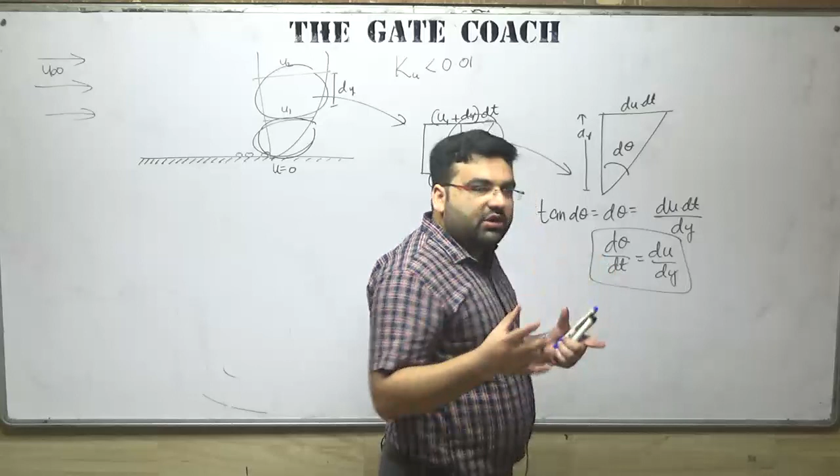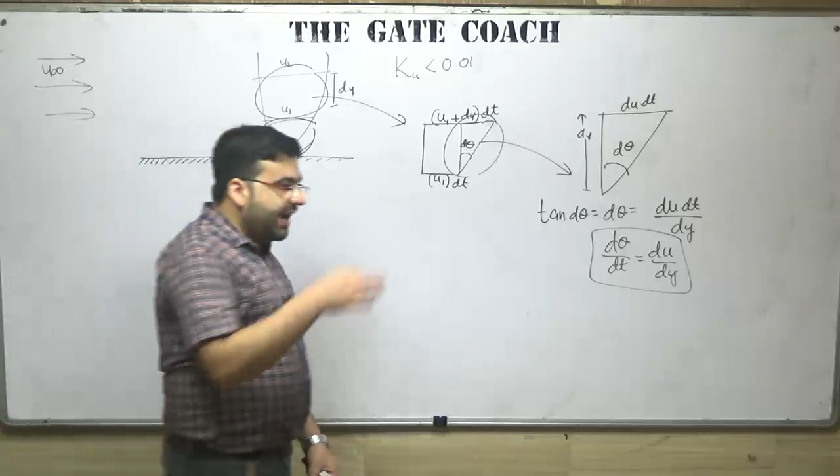Because obviously some students must be having some concepts of fluid mechanics already, and they want me to finish the syllabus as soon as possible. But we also have to take into consideration those students whose fluid mechanics is at 0 level. When I started preparing for GATE examination, my weakest subject was fluid mechanics, so I had to put a lot of efforts in it, and today you can see that I am teaching you fluid mechanics. So we have to take into consideration that student also who has very weak concepts. I am of 0. Yeah, even I was 0.

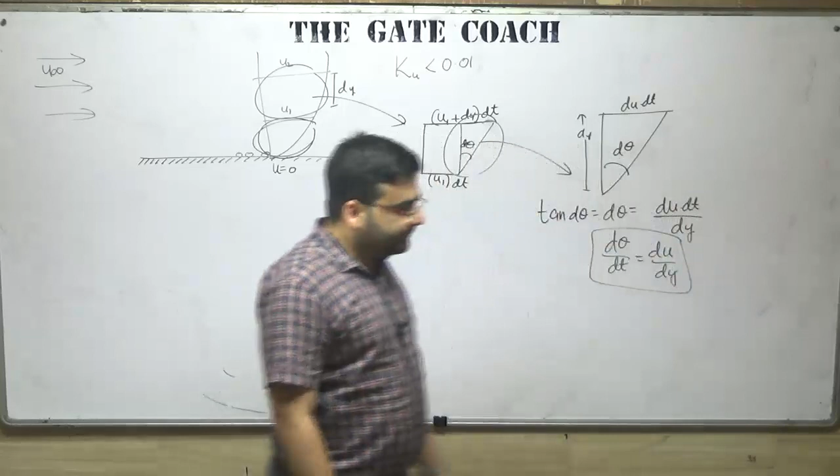So the relation between Newton second per meter square and poiseuille, both are the same thing. Newton second per meter square, poiseuille, both are the same thing. So mu is equals to Newton second per meter square, that is known as poiseuille, and Newton per meter square is known as Pascal. So we can also say that the SI unit of this is Pascal second.

And when we went to the CGS system, that is dyne second per centimeter square, and that is poise. And if you look at this, dyne is, if you remember, one dyne is 10 raised to the power minus 5 Newton, and 100 centimeters is equals to 1 meter. So if you put all these values here...

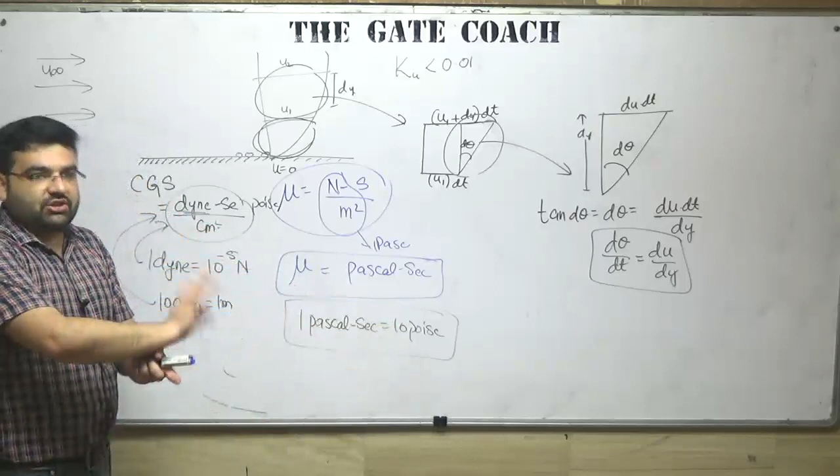What you will be getting is that 1 Pascal second is equals to 10 poise. So you will be getting this relation. Don't worry, we will be continuing this from tomorrow also, the relation between Pascal second and poise, but both are the units of viscosity.